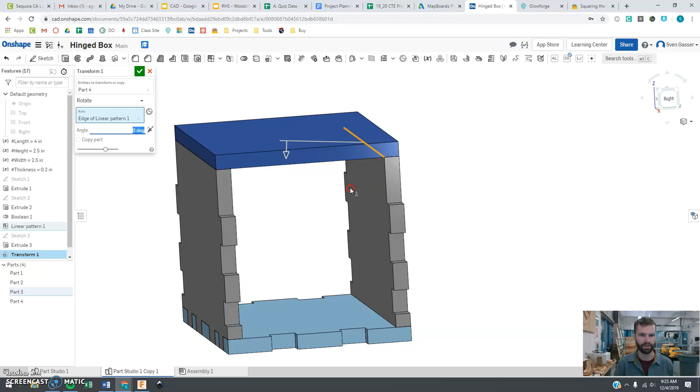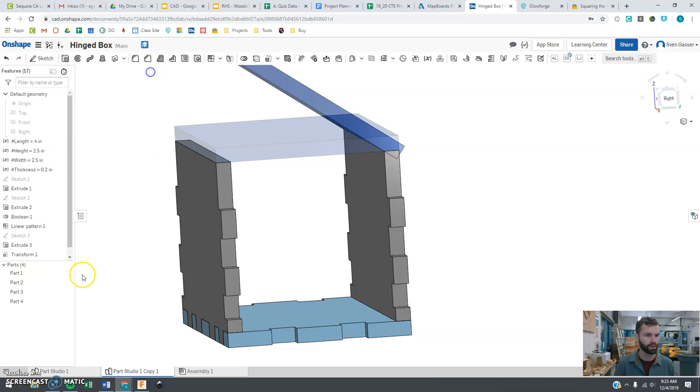We want to rotate this, you'll notice if this lid comes up, the back side is going to hit the rear of the box here. So we need to be aware of where this hinge is going to be so that it doesn't collide with anything. There's a couple ways to solve this problem, and we are just going to try and find the easiest solution right now. If you have a better idea that you think is going to look better, absolutely go for it, because we're just doing the fast method right now.

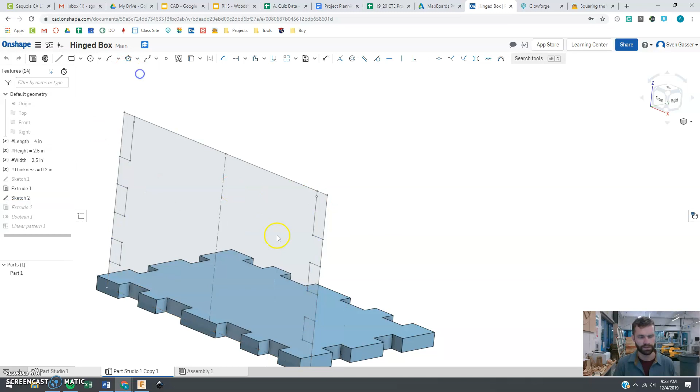Before we go any further, notice I cleared out and changed this second sketch. I made this tab go all the way up here so that I have a little more room for my hinge, and nothing's going to get in my way there. So go back and change that so that we have a lot of space there.

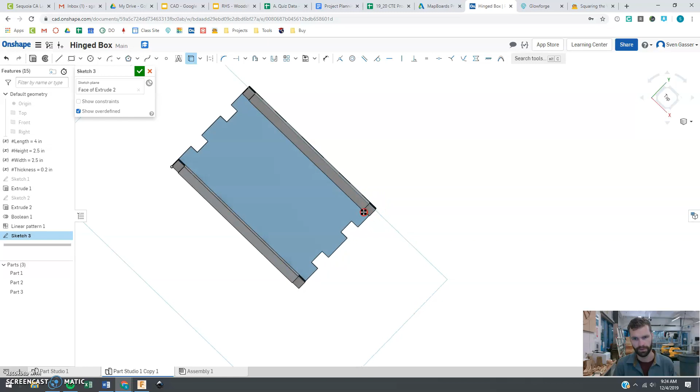Let's jump right in here. We're going to say new sketch on this top surface, and we're going to use the very corner of this and the very front edge, the inner edge one here. So when you go to view it from the top here, let's get a better view. Notice I'm not using the very back edge so that we don't have that collision we just saw a second ago.

And we're going to draw a rectangle there, connecting those corners. Now we can't have the peg, the center pin of our hinge, sticking out past the edge of the box. We want the pin to be right in this area.

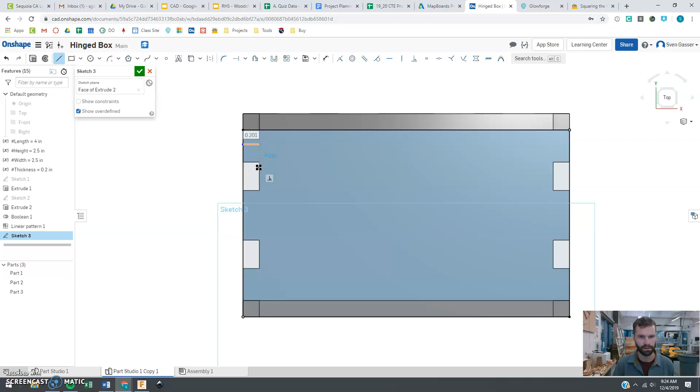So we are going to draw a little notch here that is going to give us some space here. Let's hide our other parts so I can see what's going on a little better. So let's give this a dimension. Let's call that the same as the thickness, and that's going to give us our little peg here for the center pin of our hinge.

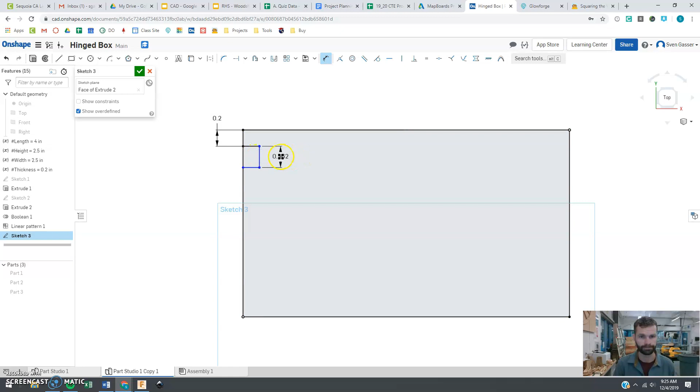And I want to make this one 0.25, right? This number can kind of change, it's up to you a little bit. All right, and let's draw a center line so we can reflect this. That looks a little odd, let's try that again, that didn't look right. I don't think we connected that fully.

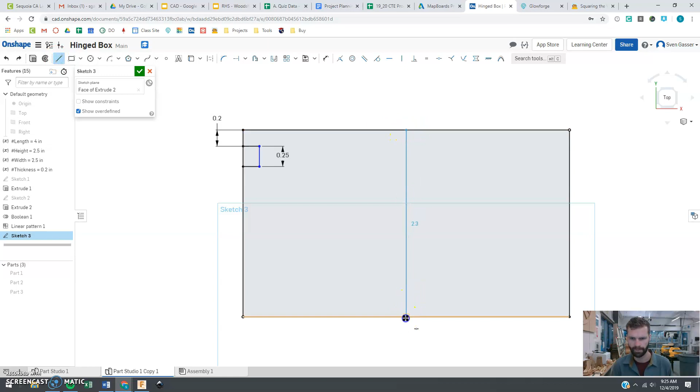And we are going to make that a construction, and we are going to reflect over that line also. And there we go, all right, here we are. That's going to be our lid. Let's unhide those other parts now again.

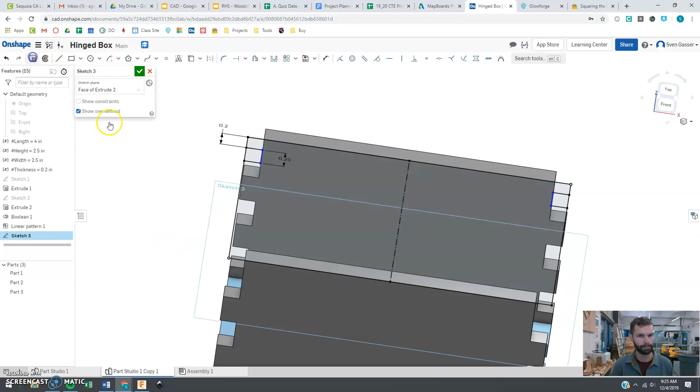And now let's extrude that. That's looking pretty good, I don't want all those faces. Let's just do that, and this surface here, looking pretty good. That's what I want, all right, that should be our thickness.

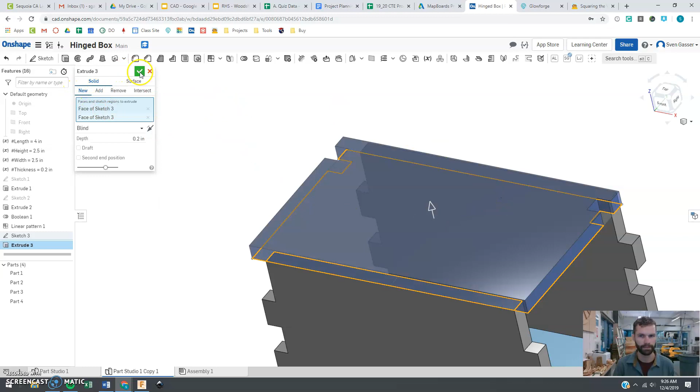And we don't want to add it, it's trying to add it. Make sure it says new. Looking good now, all right, there we are. So now when this goes to rotate, it's going to not collide with that back edge.

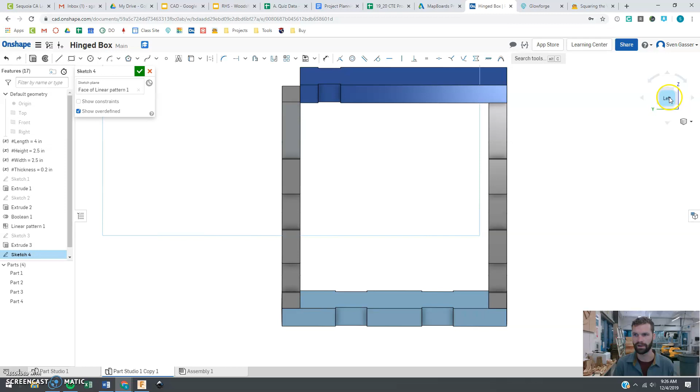So let's start sketching our side piece here. And we are going to make, first off, this square that we have, our hinge, is going to need a circle around it. So we're going to say 3-point circle, and we didn't use those points yet. We got to select that, and we want this front edge here, bottom edge, there and there, and we're going to want that right there also.

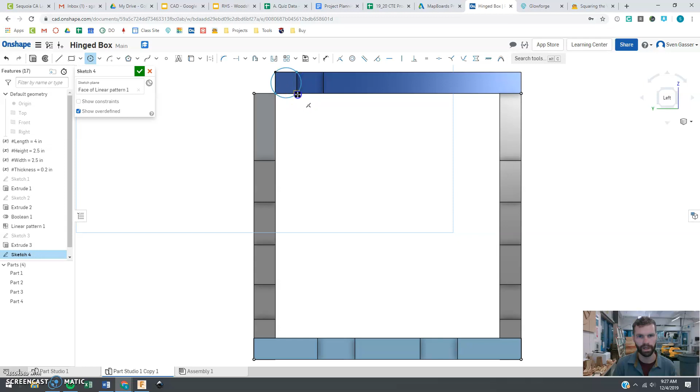All right, boom, boom, boom. We got a circle that's now going around that, so that's going to be the hole for that. And then we are going to start connecting some dots here. So again, I'm going to hide this so it's a little easier for you to see what's going on here, connecting the dots, this is the side of our box here.

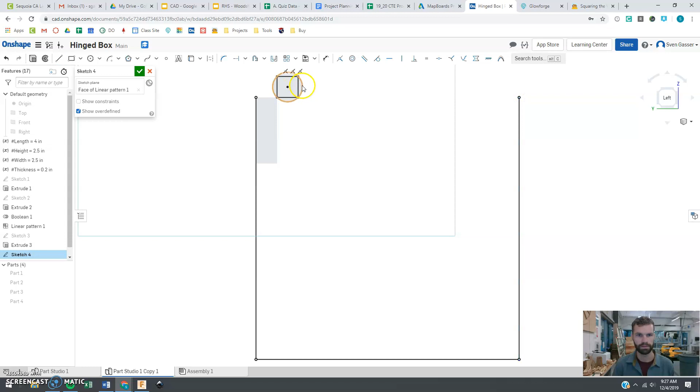And next, I want to draw a nice circle here. So this is the outside ring of our hinge, so that the whole thing has a hole to go through, essentially. And let's see what that looks like when we don't want things to overlap here later.

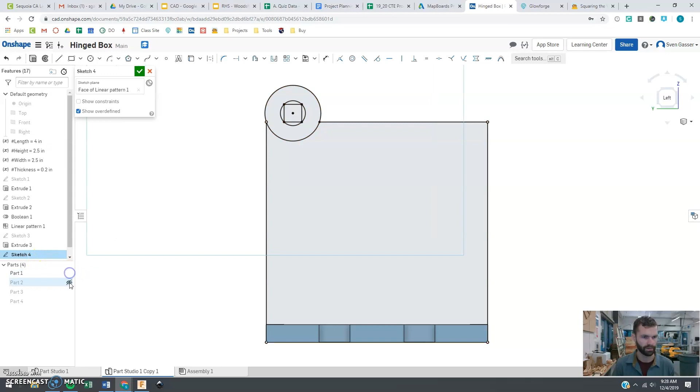So let's just double check. Yeah, so that's not going to collide with the lid there. That looks pretty good, all right, boom, boom, boom, boom, boom.

All right, and now let's trim away some parts that we don't want. That's not what I want there. We got trim, here's trim, get rid of that. That looks pretty good now.

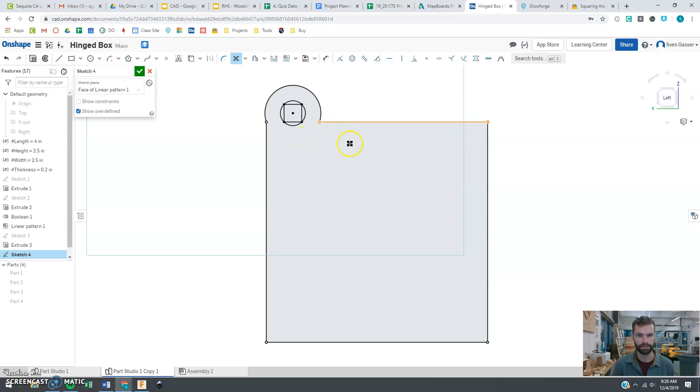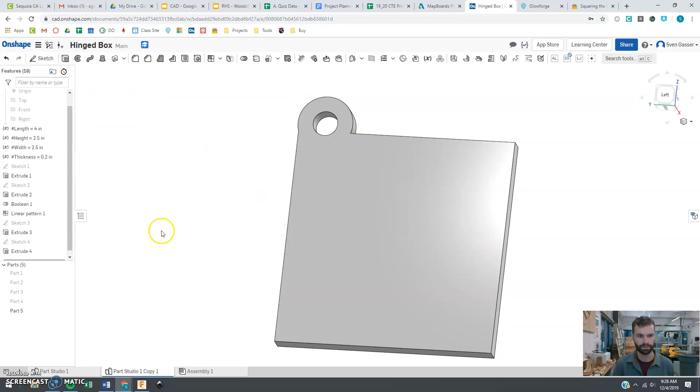Let's extrude this, and we're going to be extruding just—come on, there we go. That's going to be our thickness. All right, new piece, bingo bango. Let's unhide all our other pieces again.

Hey, there, it's starting to look like a box, huh? All right, so we want to do one last thing.

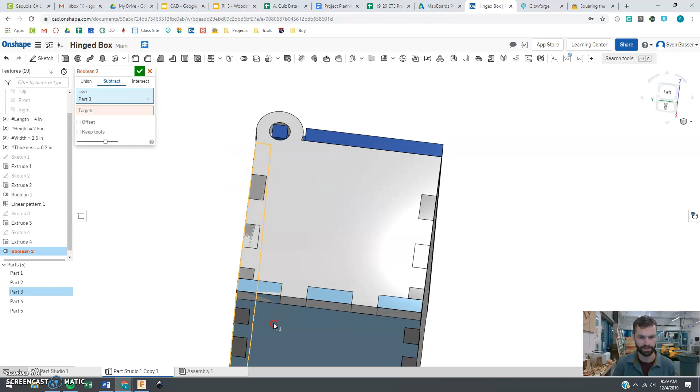That's going to be our Boolean subtract, as we've done before. Tools are going to be all, we don't need that tool as a tool, all our other pieces, so we cut the tabs in there. Our target is going to be this piece here, and that's looking pretty good there. We can see where it's going to cut, but we want to keep those tools. We'll say OK, and bingo.

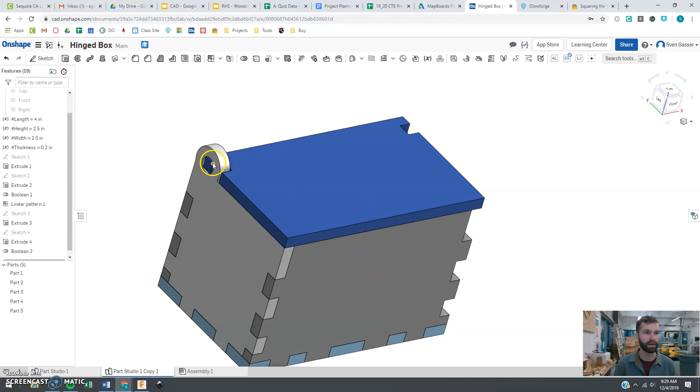Now we have a box with a lid that's going to be able to open. If you want to play more with this and try and design your own little hinge here for how to make a little lock or something like that, I'm going to leave that for you to get creative and solve. There's a lot of different ways you can create a little locking mechanism here. Enjoy, bye-bye.